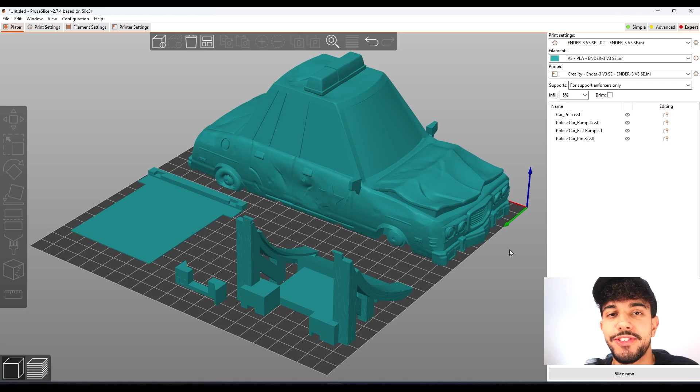In today's how to slice video, we're going to be checking out an awesome skate park. So let's go. So this is the police car ramp. As you can see, this is a really nice model to print and to play with. So in this video, we're going to be checking out the best print settings to print this. So let's go. So first off, right here, let's take a look at the parts.

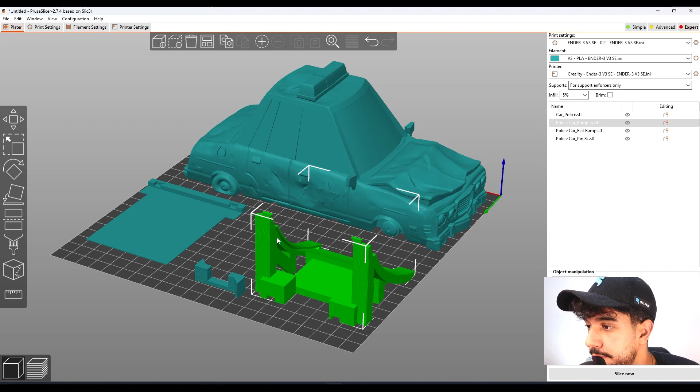So we got the police car right here, the ramp. So we can be attaching 4 ramps to this car. So one on the side right here, another one on this side, one on the front and one on the back. So we can be printing 4 ramps like this one. So this is the flat ramp right here. And this is the ramp structure.

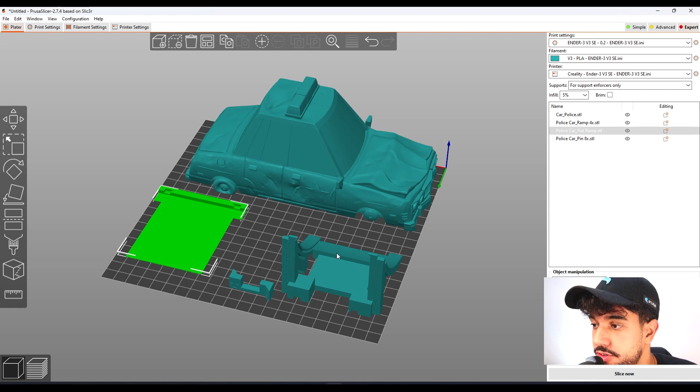So this looks quite nice. You can just print the flat ramp and insert it right here. So we're gonna have to print 4 of this one and 8 of these pins as it shows in the file. First off, let's start with the police car. So let's go to the print settings.

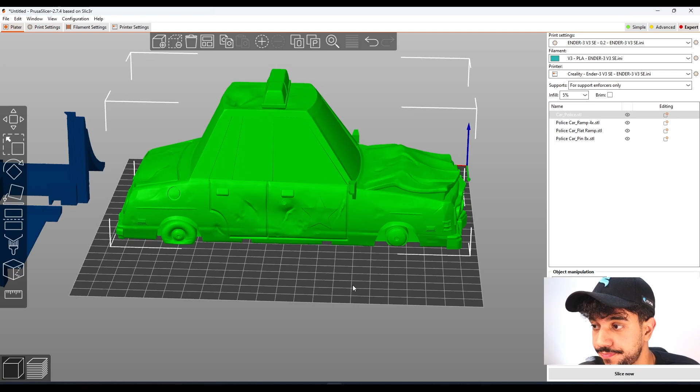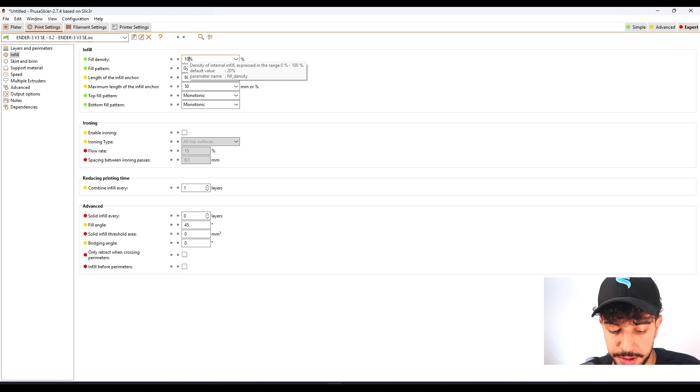Over here in layer height, we're gonna be printing this model at 0.2 millimeters. As this is a big model, we do not need to reduce it. So we're going to have a really nice quality print with a really fast print. So we do not need to worry about that at all. Going over to perimeters, we're going to be printing at 3 perimeters just to have a really rigid model. And over here, we're going to be increasing to 10% just so we can get a dense model print.

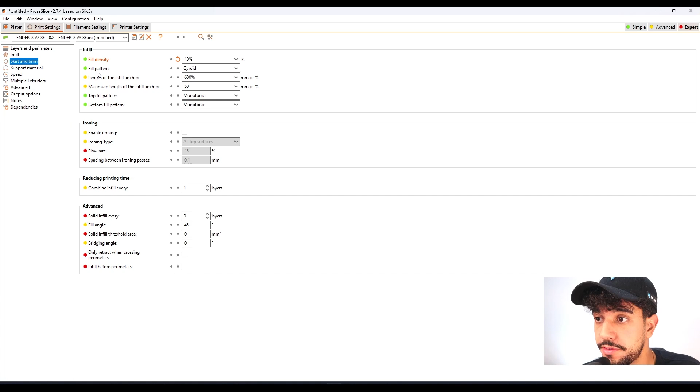We're going to be printing this at gyroid infill pattern because gyroids are really nice infill and reduce the chance of your print failing while printing the infill because it prints in waves. So your printer never goes on a straight line. This reduces the chance of resonance. So it's going to help a lot while printing. Going over here to skirt and brim, this model does not need any brim because it's got a good surface of contact to the build plate, so we do not need to worry about that at all.

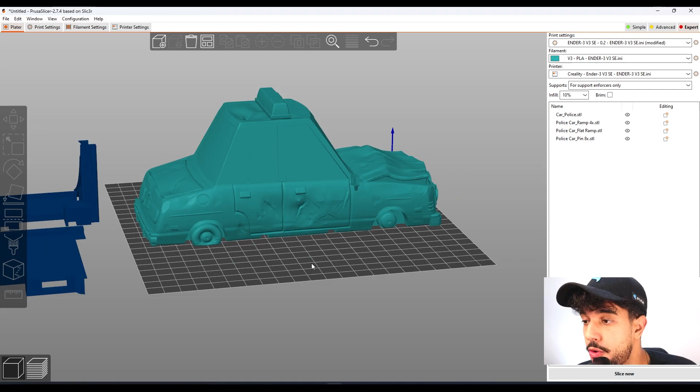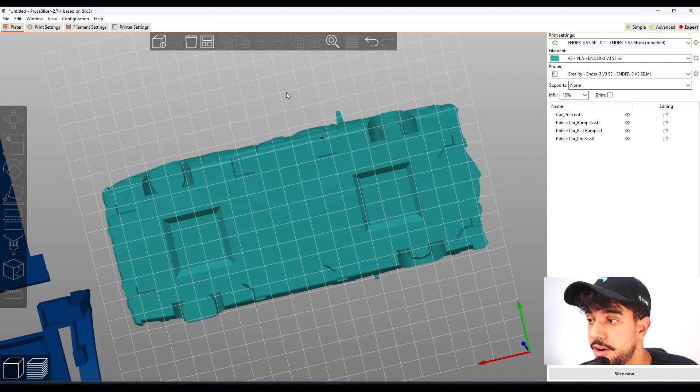Going over to the print settings right here on support material, we're going to be adding support material to the car. To show where we're going to need support material, a good way is to slice without changing any configurations right here, so not changing this value. So let's just slice and see where the slicer is going to show where it needs support. And after that, we're going to be painting on some support.

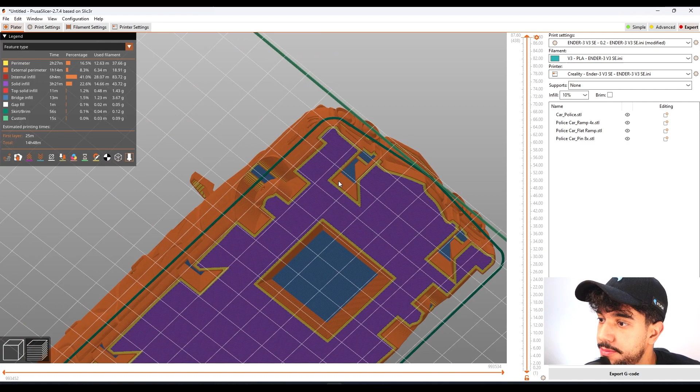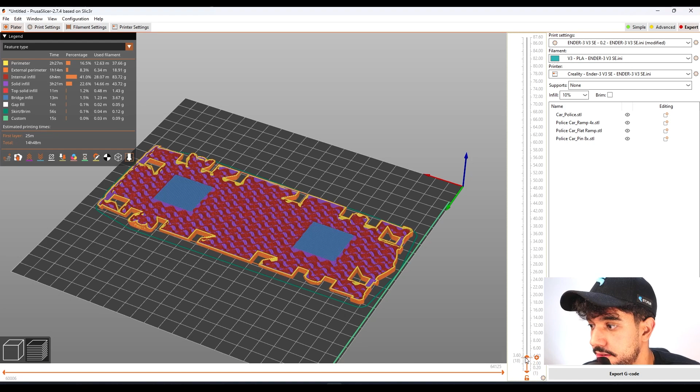So let's slice. So as you can see, we have sliced and it shows a warning that it really needs support. So let's take a look. So these parts right here in blue are where they're most critical. So this is a long bridge that it's warning that we need support. So if we go down the layers, you see where the parts are bridging. So it's not printing mid-air, but it's doing a long bridge. So it does recommend us adding a little bit of support.

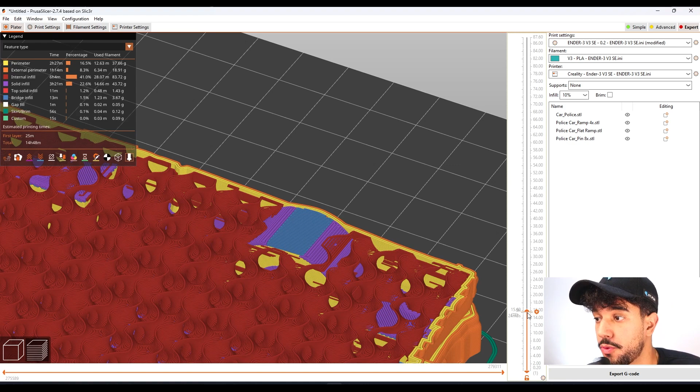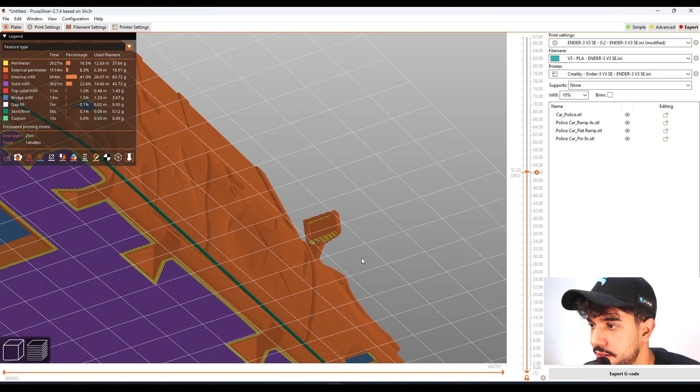This part right here is an arc, but we got a bridge. So if you want, we can be adding support. So to be safe, we're going to be adding support to every part that it's alarming us. So as you can see right here, it does not need any support. It doesn't show any critical parts right here. So this is great. We're just going to be adding some supports to these inner parts that are going to connect the pins and this under part right here.

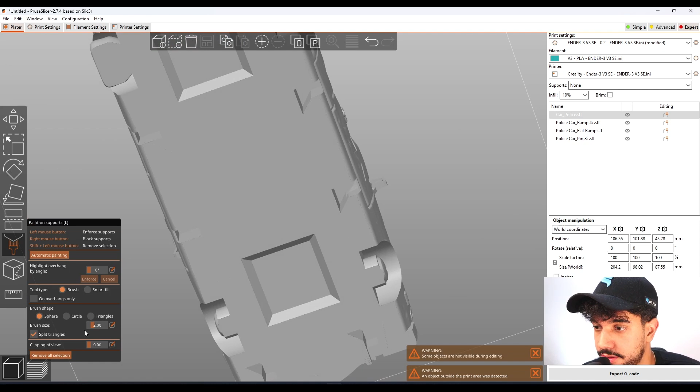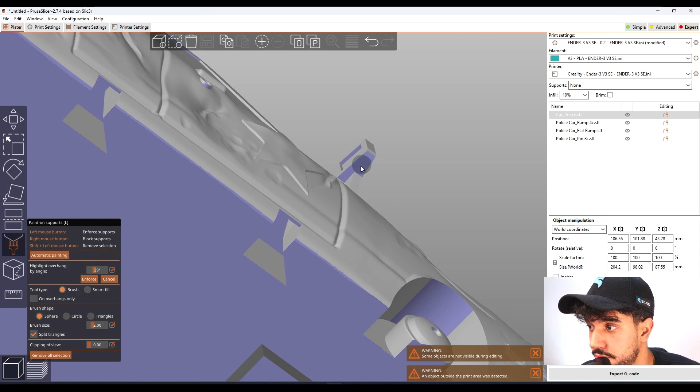So let's go back, just select our model and go to paint on support. Sometimes slicing is better to see, but another way to see where we need support is to just set it right here to 30 degrees. All the parts in purple are parts that are most critical. So right here, it shows that this part's critical, this is critical, this part right here is touching the build plate. This is critical, so we're going to be adding some support.

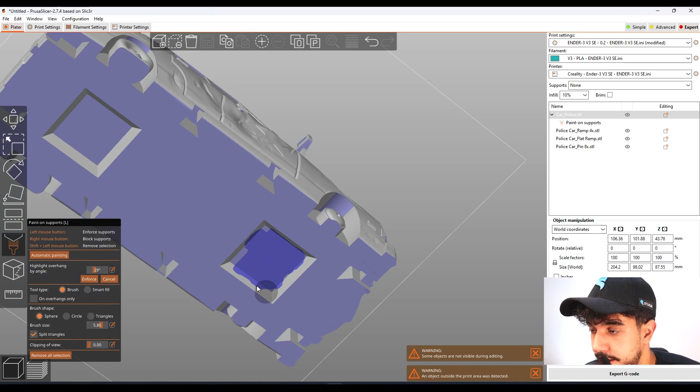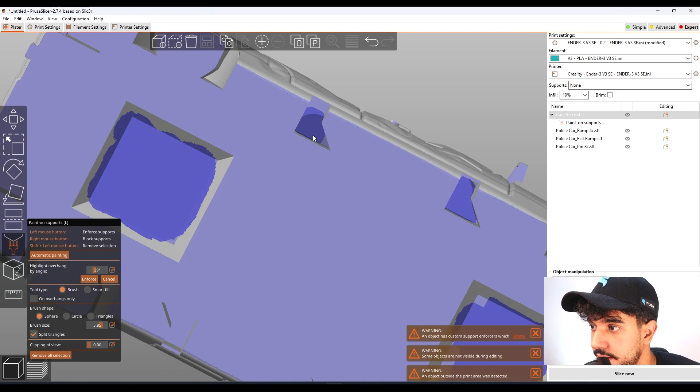To do that, let's just increase the brush size. So first we're going to be adding some support in this under part. This is a bridge, but it's better to add support and have a good print. So let's just add some support. In this case, let's just select all of the inner parts. We can be a little bit rough while adding some support right here because this is a bridge. You could be printing without any support.

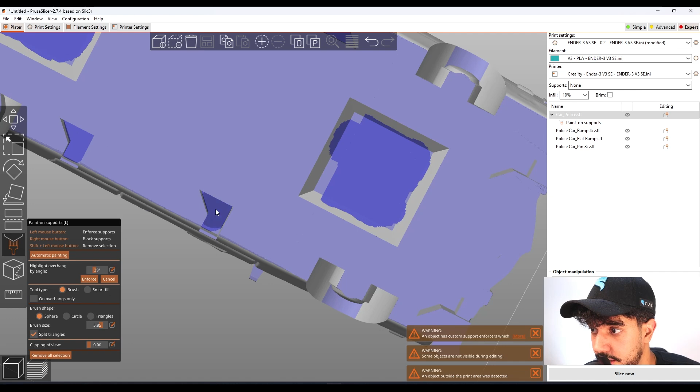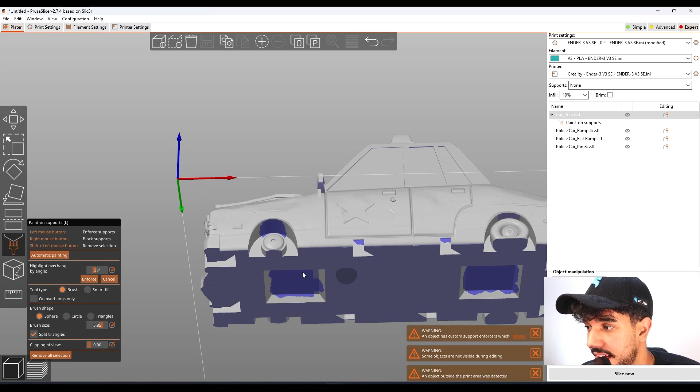This is quite a small bridge, but it's recommended that on not too stable printers we add a little bit of support. It's always better to add support. I always recommend having your prints print slowly and with support to make sure you got a good print, rather than printing it fast and having it fail multiple times. So now we have added some support in this inner part. I'm going to be adding some support right here to help with the arc.

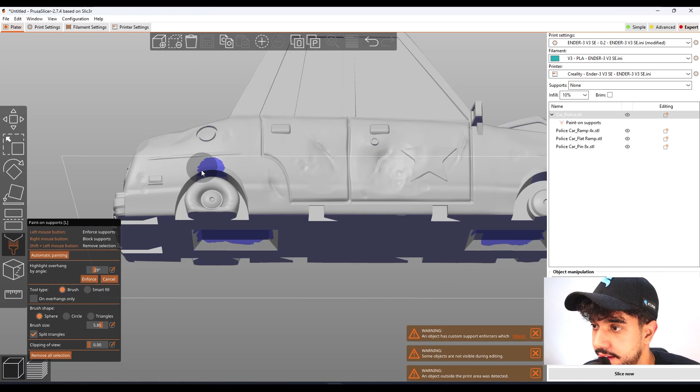So painting the inside right there. Let's go to the other side. So add just a tiny dot. If you mess something up, you can just hold Shift and delete. So this is quite nice. So we're just giving a little bit of support right here in this part.

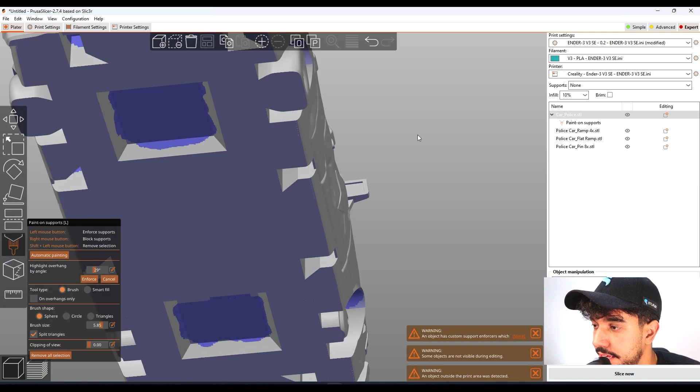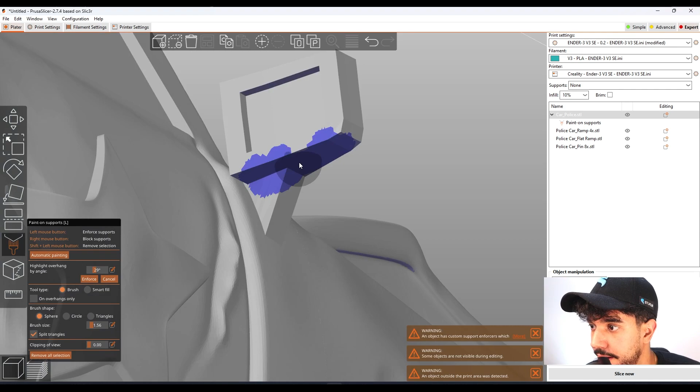I'm going to be adding a little bit of support right here. It's not required, you do not need it. I'm just going to do that to get a good quality print. Sometimes this overhang is quite steep. It's a really small part. So I'm going to be adding a little bit of support right here, just to make sure. It's better to be safe than sorry.

So, perfect. This is amazing. We have added just a little bit of support right here in this inner part. This is great. So let's go back and change the print settings for support. We're going to be adding support now. Yes, we're going to be selecting organic support. This is better for curvatures.

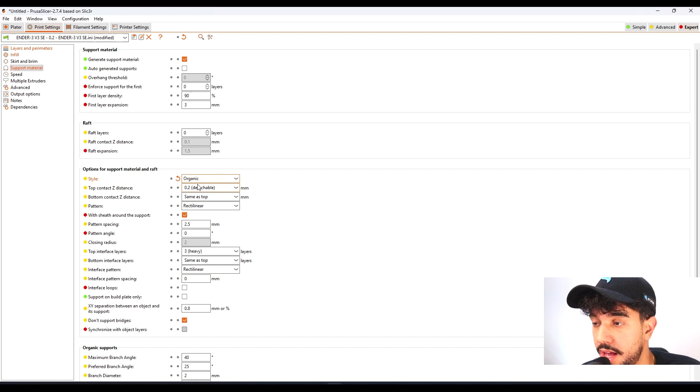For models that are really flat, it's always considered to use a grid. But in this case, there is just an arc, so it's recommended that we use organic. It would be better for the lower parts, the under part of the car, to use a grid. But in this case, let's choose organic.

Going over right here to top interface layers, we can reduce it to 2 just to make it faster. It's easy to remove all of those parts. So this looks quite nice. We just changed a bit. Do not select auto-generate support, because we have painted.

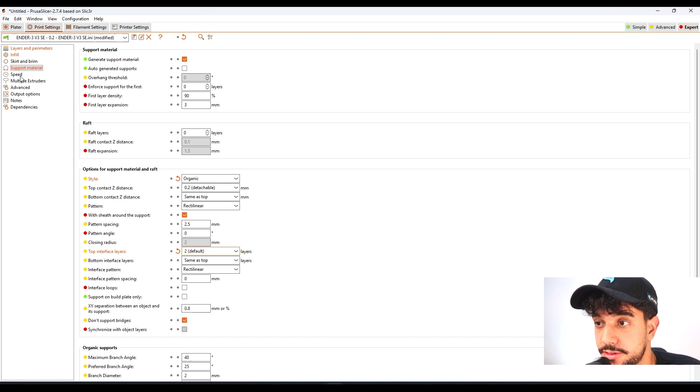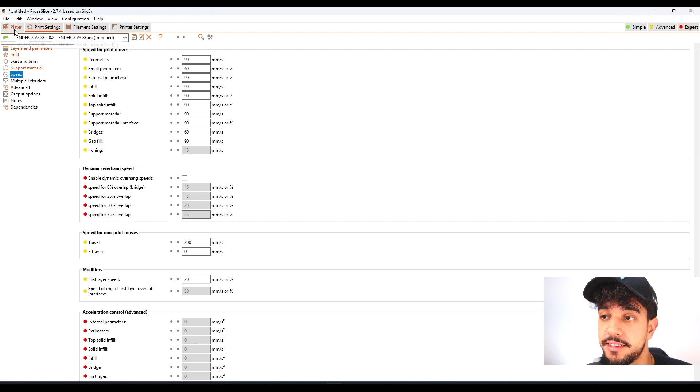So this looks fantastic. Going over to speed, we can print this model at the standard print speed, so you do not need to worry about that at all, especially for Bambu printers. Just make sure that your first layer is at a good value, because the first layer is the most important layer, since all of the other layers are going to go on top of it. So make sure you get a good print.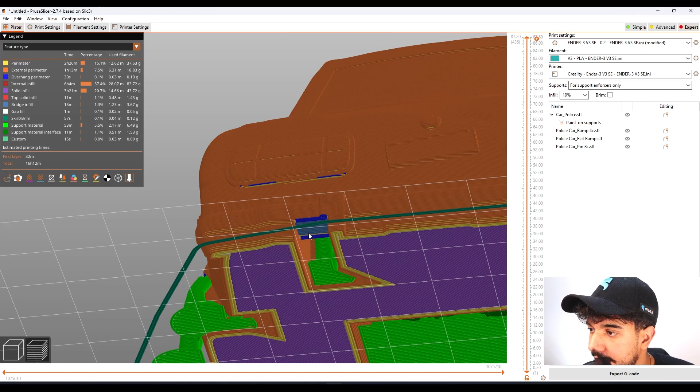So now let's slice and take a look. As you can see, we have sliced and we have added some organic support. This looks fantastic. As you can see, I have missed a spot right here, so we can add a little bit of support. It wasn't showing too well in the paint-on support. That's why I'm showing you right now, because sometimes I find it easier to slice and see where the blues are to add some support.

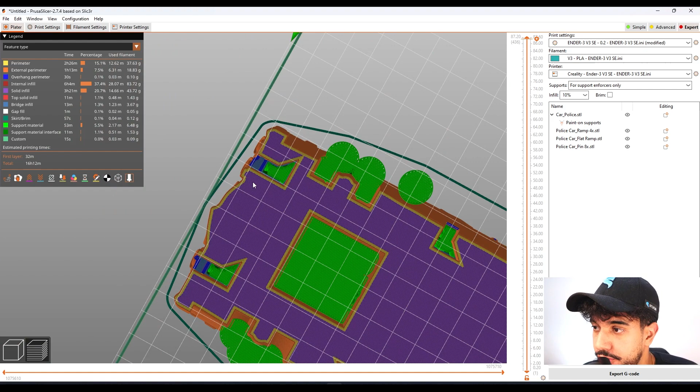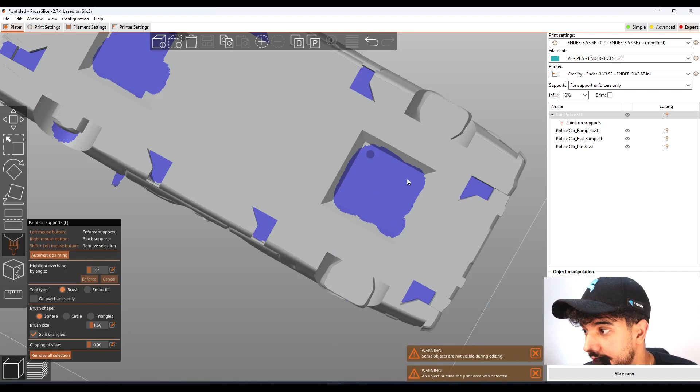So I'm going to go back and add some support. In the paint-on support right here, it wasn't showing, see? This part wasn't showing well where we needed support. That's why I find it easier to slice and see where we need it. As you can see, I have finished adding to all of the parts, the front and back. And now let's go back and slice.

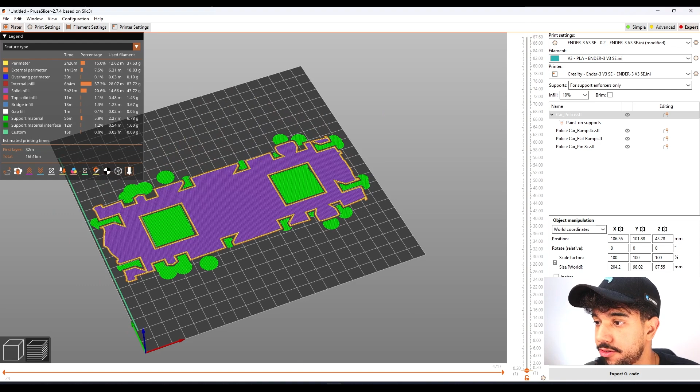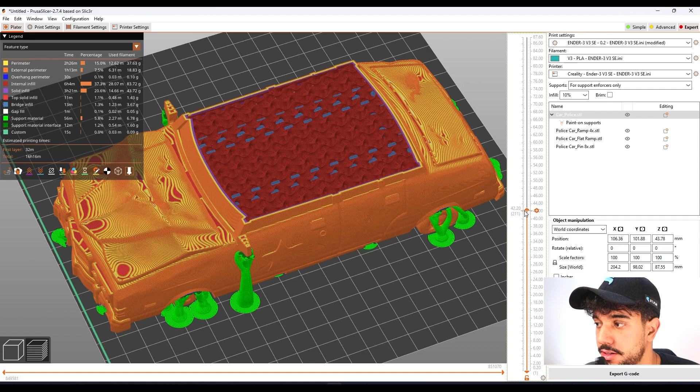So now we have sliced, and it's going to take 16 hours and 16 minutes to print. If we go down the layers, you see that all of the supports are going to help a lot. We have added some support right here to help print these parts that would be quite a steep overhang, and it's going to turn into a really nice model.

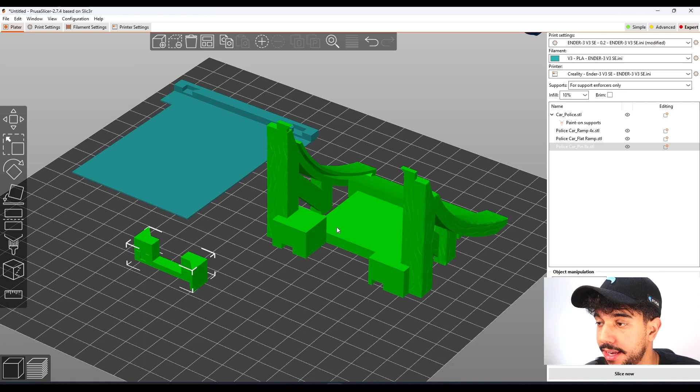Let's take a look at the others, the ramps and the pins. As for the ramp, the structure of the ramp, the flat part right here that attaches in this top part, and the pin, we're going to be printing multiples: 4 of them and 4 of them too, so we can attach them, and 8 pins. So you can fill your build plate with multiple models.

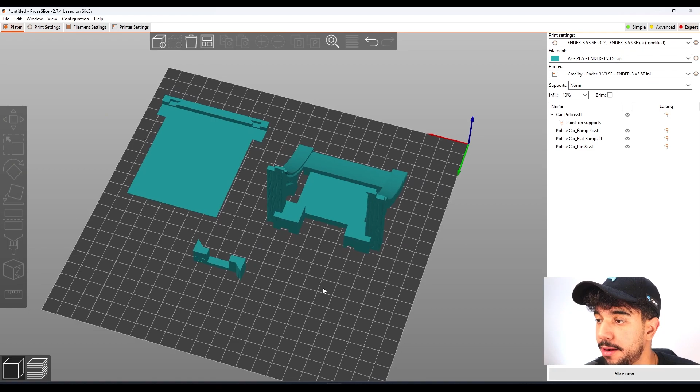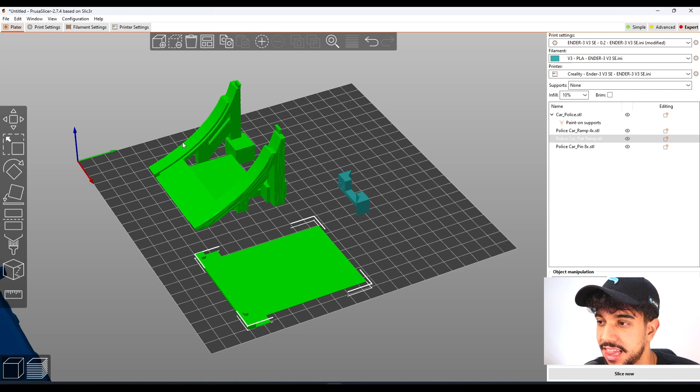Going over to the print settings, the only thing we're going to change is the support material, because this model does not need any support since it's all optimized for printing. Your printer can print this overhang, and this is an assembly part to help out without having to add any supports to the ramp or getting weird lines while printing this curved part. This is why this is flat. So let's just slice, and you can print at this configuration.

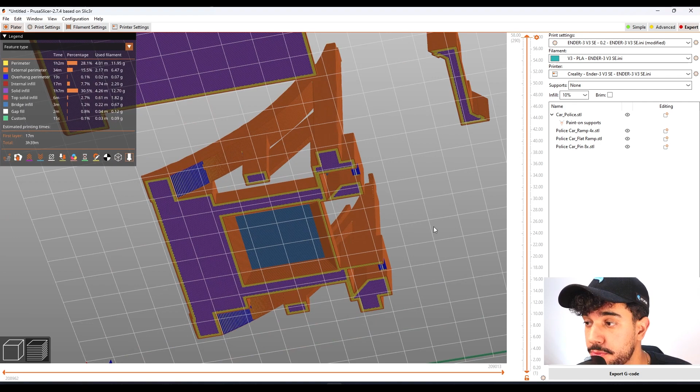As you can see, we have sliced. It's going to take 3 hours and 39 minutes. We have printed this before and we did not need any support, and we were able to print it fine. But if you want to make sure, you can add support the exact same way we did before. The PDF does not show that you need support in this part. This is optional. So grab a really nice filament that you have lying around and print this model right now.